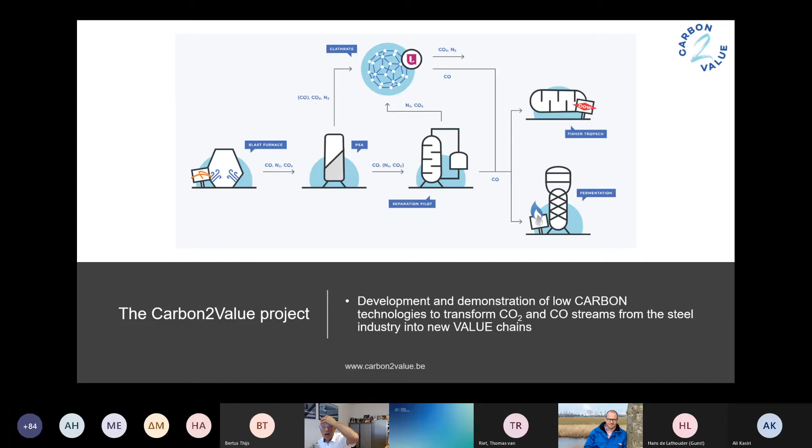What can you expect from today? We have 3 speakers from associated partners and consortium members. First, a state-of-the-art review by Jurjan Boon from TNO, followed by a presentation of the work done in Lille on developing clathrates for CO2 capture. We also asked ourselves how a process for CO2 capture with clathrates would look, where the challenges are, and what the potential costs would be. For that, we had a team from the University of Twente working on conceptual process design aspects of this technology. Hopefully by the end of this seminar, you'll have a clear view on what's possible with this option and whether it would be competitive to the state-of-the-art, and the more commercial applications we'll present on the 22nd of June.

With that, I think we should go back to Geoffrey, who will probably touch the poll again before we move into the technical content of today's webinar.

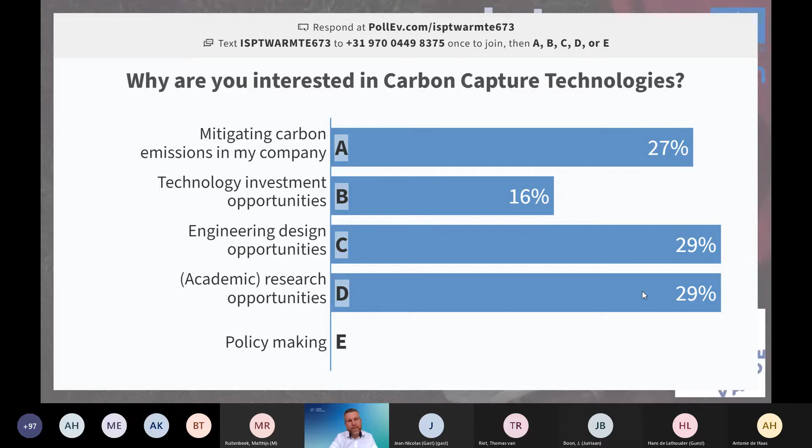Then I'd very much like to move to the content for which you came. I'd like to introduce Jurjan Boon, Senior Scientist Process Technology at the Dutch Research Institute TNO. He will provide us with context and tell us about the status and outlook of current CO2 capture technology. Jurjan, if you would be so kind. Thank you, Geoffrey. I hope you can all hear me right.

Then I will present. It's by no means meant as an exhaustive overview of everything that's going on, but I would like at least to leave you with a flavor of some of the things currently ongoing in Europe and throughout the world in terms of CO2 capture, and how the recent trend towards more efficient capture can really pave the way for the implementation of CCUS as an industrial technology.

Well, let's briefly recap why we're all doing this.

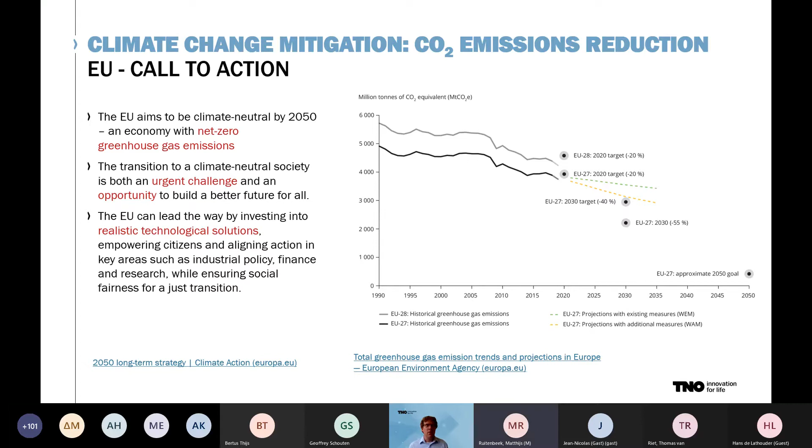And the EU is ready to lead by investing in what they call realistic technological solutions. So technology plays an important part in achieving these greenhouse gas emissions targets. If you look at the figure on the right, you can see that greenhouse emission intensity has gone down severely. At the same time, the targets for 2030 and even 2050 are still quite a long way off. So indeed, new technological solutions are called for.

Now, if we make a subdivision of industry in terms of different sectors, then it's clear that the iron and steel industry, as well as the cement industry, actually play an essential role in terms of CO2 emissions and CO2 emission reduction.

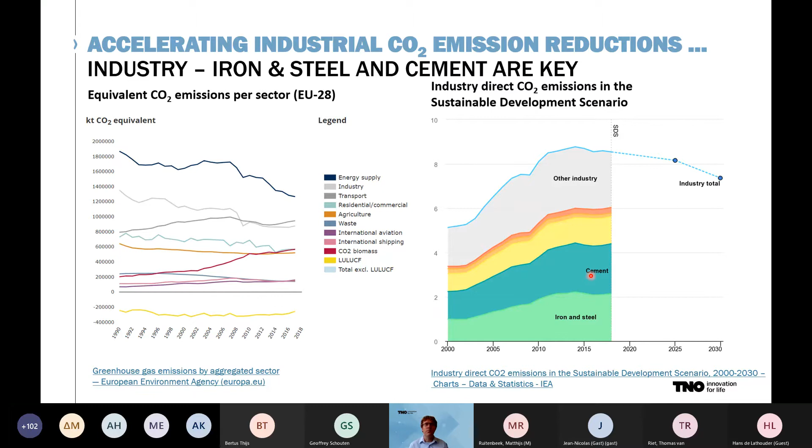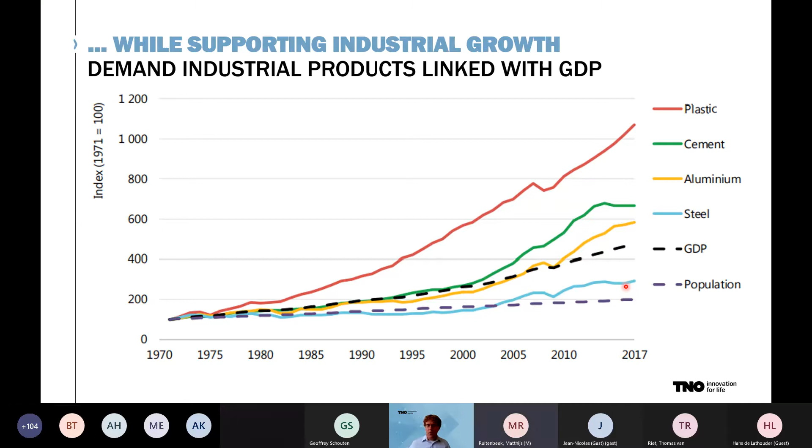Sorry, we've lost the slides. That's weird, let me see what I can do. Going to disconnect - yeah, same here, Jurjan. Maybe you can stop sharing and try again, because I hear you perfectly here. But okay, indeed we can hear you perfectly, it's just the slides have been lost. And now, it seems like, at least for me, the chat is not available. We are working to solve that issue. Oh, I see somebody else tried to share the screen - maybe that was the reason for it.

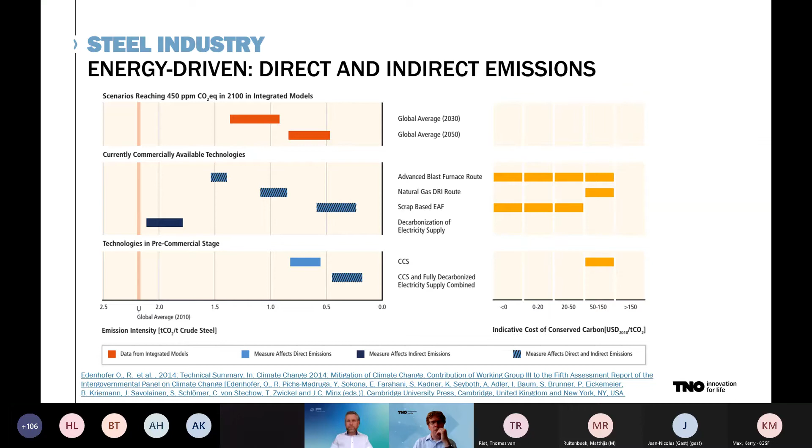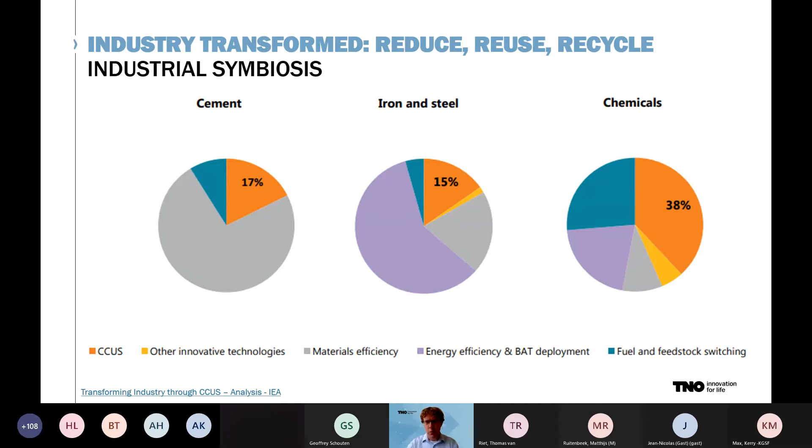There's also an opportunity for fuel and feedstock switching, which is actually the topic of the Carbon2Value project - to integrate the steel mill with the plastics industry, as Matthijs has explained in the beginning.

Well, some final remarks about CCUS.

CO2 capture is essential in the energy transition. It can be retrofitted to avoid significant amounts of CO2 from existing infrastructure. It can tackle emissions in difficult to decarbonize industries like cement, iron and steel, and chemicals. And it can also set up the infrastructure to move towards synthetic fuels and feedstock for long distance transport that are still required by 2050 and well beyond.

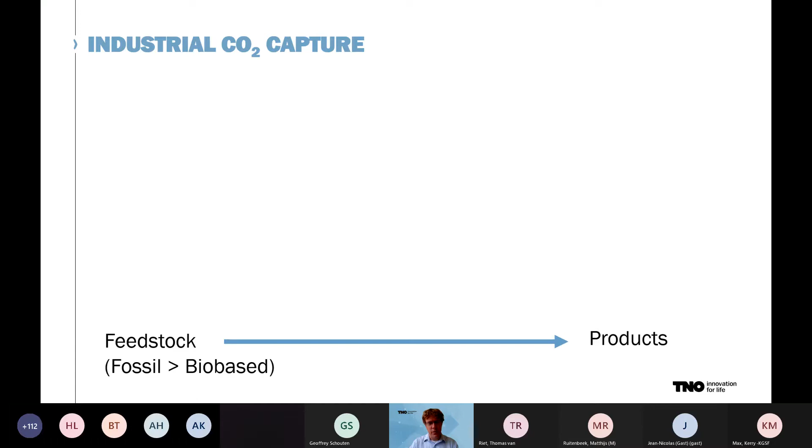But the carbon and hydrogen will still be the main constituents. We have an industry that creates these products from the feedstock. Of course, we have air to combust the feedstock and generate the heat often required to produce these products. That means out of the stack, we have a mixture of CO2, steam, and nitrogen coming out. This is a very rough simplification of the chemical industry. I'm a chemical engineer, so I'm very fond of simplifying things.

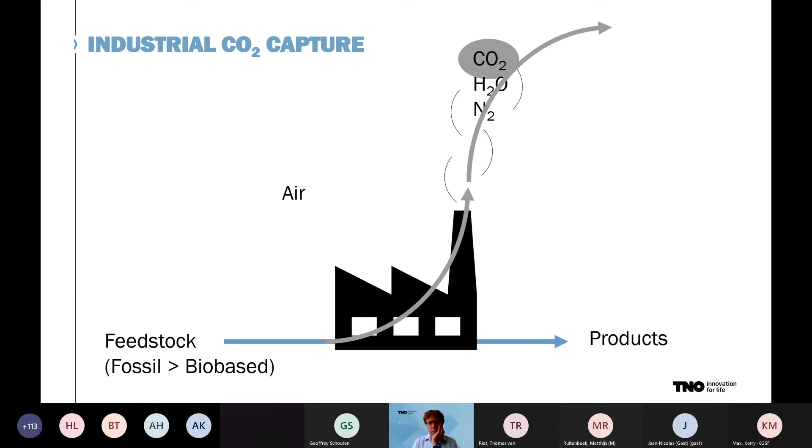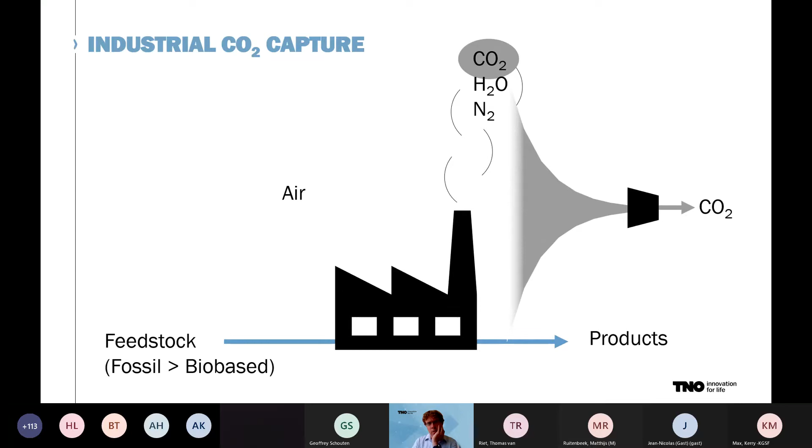If we follow the trajectory of the CO2, where it came from and where it ends up, we can draw along this line a figure of the concentration of CO2. Because from somewhere along this line, we need to capture the CO2. The reason I'm looking along this trajectory is because there's a big difference in the concentration of CO2, as I've tried to indicate here on the left. All the way at the end, when the CO2 is mixed in the air, we end up with about 400 ppm of CO2 at 1 bar. So that's a very low concentration of CO2, very dilute.

You could also think of end-of-pipe solutions in the tail gas of the process and capture the CO2 there. Then typically you are at 100 millibars of CO2. At the same time, it's also possible to capture the CO2 before, even in the process—what we call in-process CO2 capture. The figure on the left shows the importance of doing the CO2 capture as early as possible, because with the increase of the CO2 partial pressure, the ideal work required for the separation of CO2 is strongly decreased. So by moving earlier in the process, we significantly reduce the work required for CO2 separation.

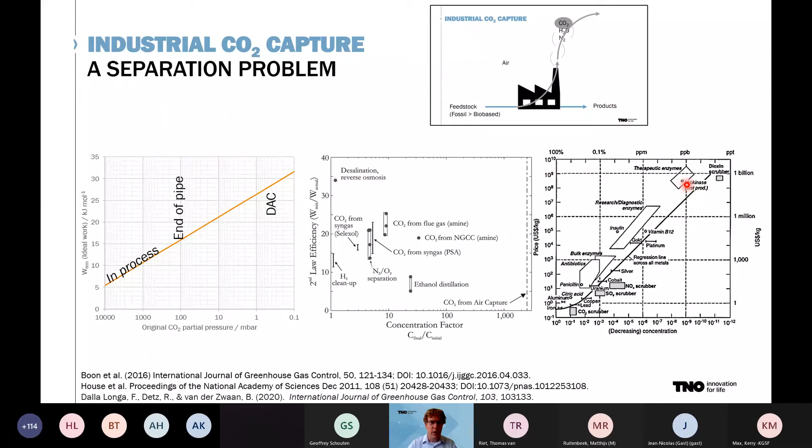Now, this is the ideal work, and the situation becomes even more severe if we also look at the efficiency of the process, because the efficiency tends to increase with a reduce in concentration factor, as shown in this graph. Finally, in terms of the economy of the process, again with decreasing concentration, we see the price of many separation processes follow this trajectory, where you have a significant increase in the price of a separation process the more dilute the species is you want to capture. So all of these three effects combined point quite strongly in the direction of what we call in-process CO2 capture.

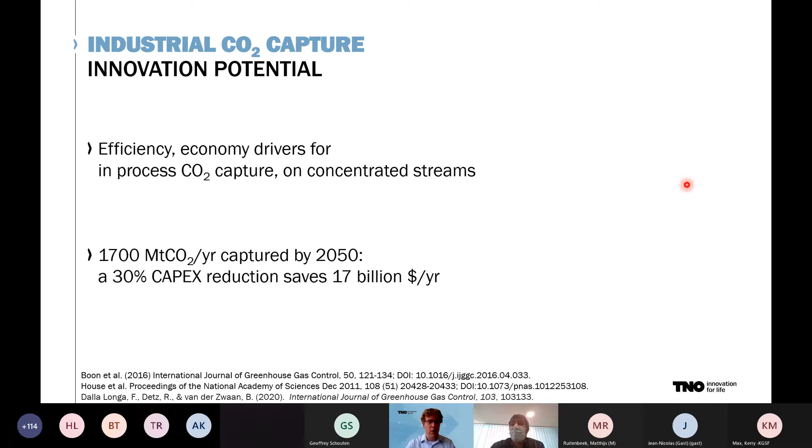So to summarize, that's also where the innovation potential is. The efficiency and economy are drivers for in-process CO2 capture on concentrated streams, and the market for CO2 capture is really significant. A recent publication from colleagues of mine at TNO in Amsterdam has shown that 30% capex reduction saves $17 billion per year by 2050. So there's really a strong driver for the improvement of the efficiency and capex of CO2 capture.

Now let's look at what can be done for steel gases. This is a simplified scheme of a steel production process, where we have coke production, a blast furnace to produce iron, and a basic oxygen furnace to finally produce steel. And there are three main sources of CO2 from these processes: the blast furnace gas, the basic oxygen furnace gas,

and the coke oven gas. Currently, the energy content of these streams is utilized internally for about 50%, which creates 50% of the CO2 emissions. But there's a lot of energy left, which is generally combusted in a power plant, which creates the other 50% of CO2 emissions, roughly.

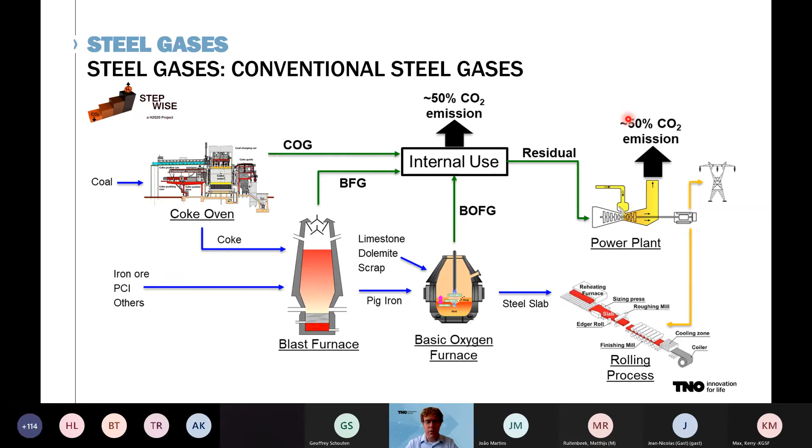Now, different ways to capture the CO2 from these gas streams are absorption, which is a gas liquid process. You contact the CO2 containing stream with a liquid that is able to absorb the CO2, which can then be released upon heating or depressurization.

Now, different technologies out there vary from chemical absorption to physical absorption, where a physical solvent typically produces a more linear graph of the absorption capacity versus partial pressure, which means that at the higher partial pressures, physical solvents are favored, whereas for CO2 capture from more dilute streams, lower partial pressures, chemical solvents are typically preferred.

And then there's Rectisol and Selexol, commercial processes available to capture CO2. The first one with chilled methanol, and the second one with DEPG.

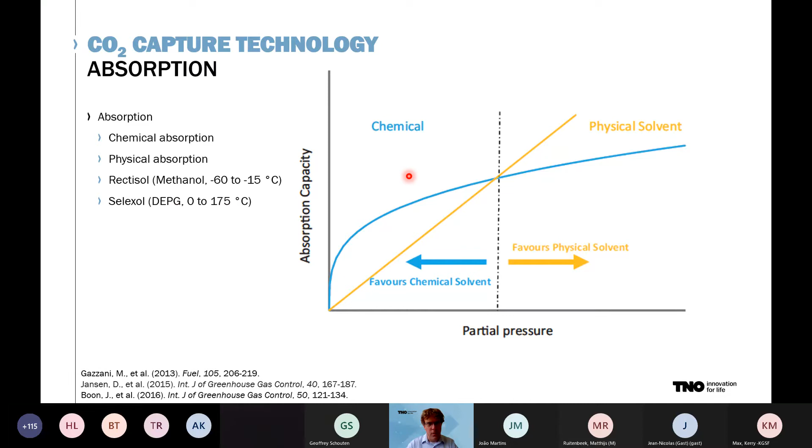Now, next to absorption, cryogenic separation is an option. This comes with a complexity that it cannot be used for too dilute streams. And well, too dilute is actually an understatement - you need typically above 90% CO2 in your gas stream to be able to use cryogenic separation efficiently. And then still, the energy penalty is an issue because of the refrigeration and steam removal that is required. Still, these systems are proposed for further purification of already concentrated CO2 streams to make them sequestration ready.

Then in terms of adsorption, actually the topic of today, different technologies have been proposed, ranging from pressure swing adsorption, vacuum swing adsorption, and temperature swing adsorption. And these systems have in common that they are multi-bed processes. So you have one or more beds that are adsorbing CO2, while other beds are being regenerated, so that the ensemble of the different beds creates a continuous cycle that recovers the CO2 from a stream.

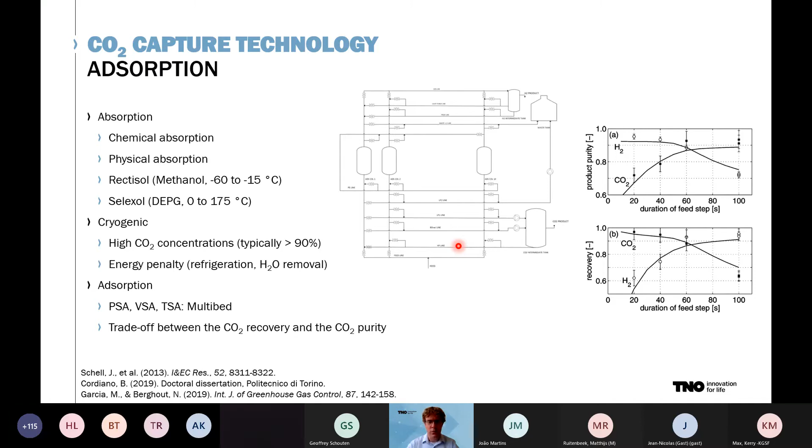And in the latter case, it's important to convert all your energy, so all the CO and hydrogen, into hydrogen, which can then be removed, which means that you separate actually the carbon from the energy content of your gas stream.

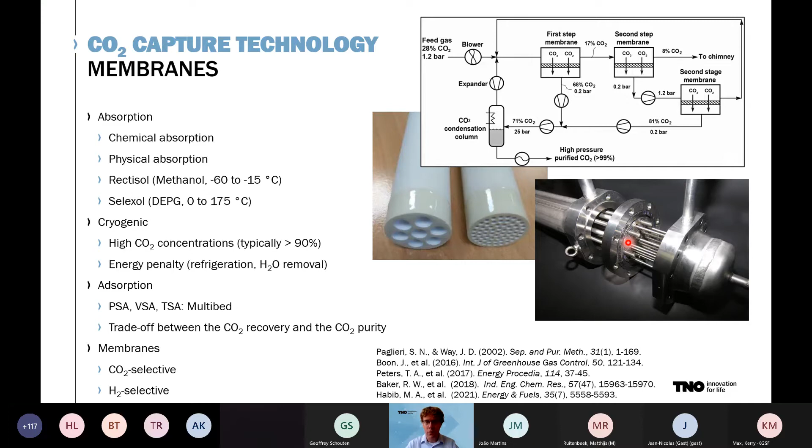Now, in looking again at the steel production case, clearly these three gas streams can be treated with the techniques I've just mentioned. I think it's important in this stage to also recall new developments in steelmaking, or in iron making, I should say, which is top gas recycling, which is basically an oxy-fuel technology. You remove the nitrogen from the air that's normally used in the blast furnace, which means that you end up with a concentrated stream of CO2.

Actually, you still need a CO2 separation unit, but the CO2 separation unit has to deal with a lot less nitrogen, so it's much easier to perform this separation. And at the same time, it allows you to recycle a concentrated carbon monoxide hydrogen stream into the blast furnace. Well, like I said, top gas recycling is a very big improvement in iron making being considered. At the same time, it still needs a CO2 separation unit. So all of the above is still valid, also in case of top gas recycling.

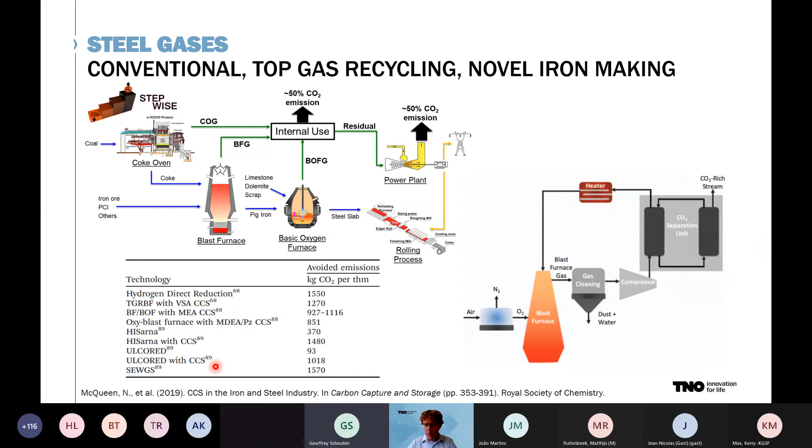Well, for your reference, if you're interested, have a look. This is also copied from the same reference, some recent initiatives.

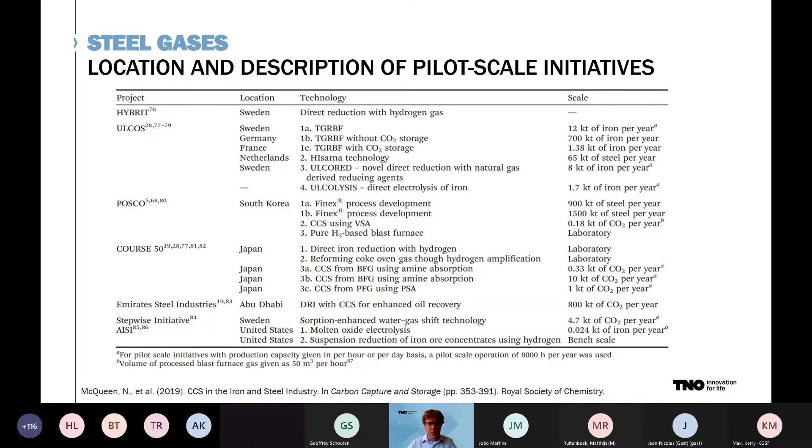As I've already said at the outset, it's impossible for me in 25 minutes to present a complete overview of everything that's being done in terms of CCS, even in the steel industry alone. So my proposal is to focus a bit on adsorption, which is really the topic of today.

Adsorption for CO2 separation is a technology that is not novel in itself. Commercially existing zeolites and active carbons are available to do pressure swing adsorption for CO2 removal. At the same time, these processes are really energy intensive and sometimes also capex intensive, so new developments are on the way to improve the efficiency of CO2 capture.

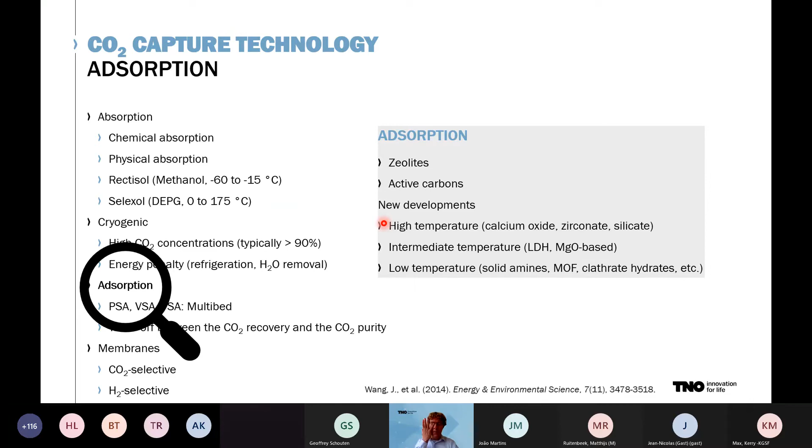Three important routes are good to mention: high temperature materials, calcium-based predominantly; intermediate temperature-based hydrotalcite; and low temperature adsorbents. To give you again a flavor of some of the developments.

For calcium, the Spanish Research Council, CSIC, is proposing what they call the CASOH process, where they do calcium looping. Calcium oxide is actually the species involved in binding with CO2 and then releasing it again upon regeneration, while working with a copper-based oxygen carrier in this process. As you can see here on the right, the different steps in steelmaking can be treated with different manifestations of the CASOH process.

And currently, the CASOH process prototype is being constructed at TRL7.

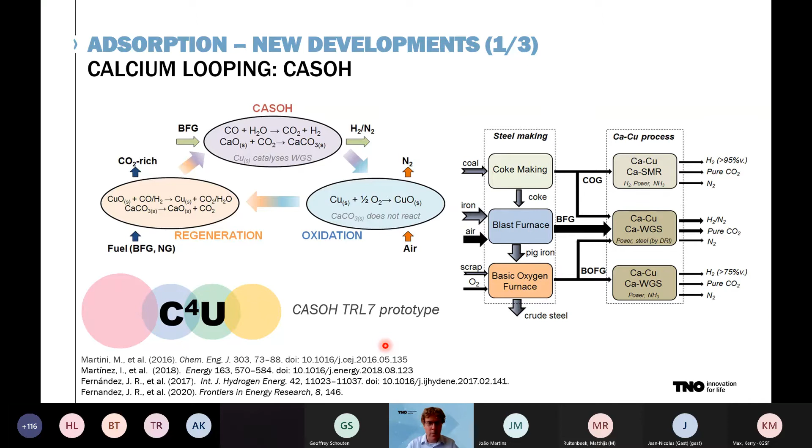The hydrotalcite-based route is also being developed at TRL7 currently in the Initiate project, where already in a predecessor, the Stepwise project, it was shown that the different streams of the steel gas can be treated separately or together, which then in the end leaves the highest CO2 reduction potential. It can go down to 0.6 tons of CO2 per ton of steel at a CO2 avoidance cost of 33 euros per ton. With the current ETS price of 53 euros per ton, that's not bad at all.

So, promising development. And then, Geoffrey, I'm glad I can end my presentation here, because I think another important topic of today is the clathrate hydrate, a new development in low temperature adsorption process. But I'm definitely not the best placed to tell you anything about that, so I will leave that to the other presenters. Thank you for your attention.

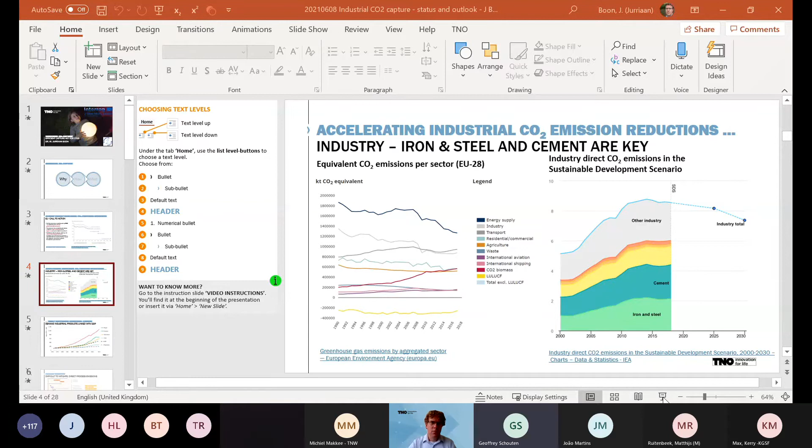Jurriaan, I think people are either shy or your presentation was very clear. Wow.

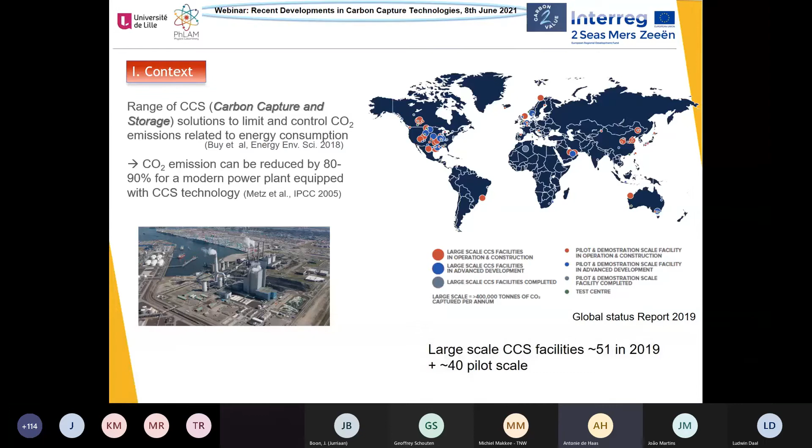On this world map, we can see the growing presence of CCS around the world. In 2019, the number of large-scale CCS facilities increased to 51, while there are about 40 pilot and demonstration scale CCS facilities operating or about to be commissioned. All these constructions have the capacity to capture and permanently store around 40 million tons of CO2 every year, and this number is expected to increase by about 1 million in the next 18 months.

So we can see here the current CCS methods under investigation. I will not enter into the details of all these techniques, but we can see that they all show advantages and also drawbacks. The most commercially mature are both chemical absorption and physical absorption techniques, but they still present some inconveniences.

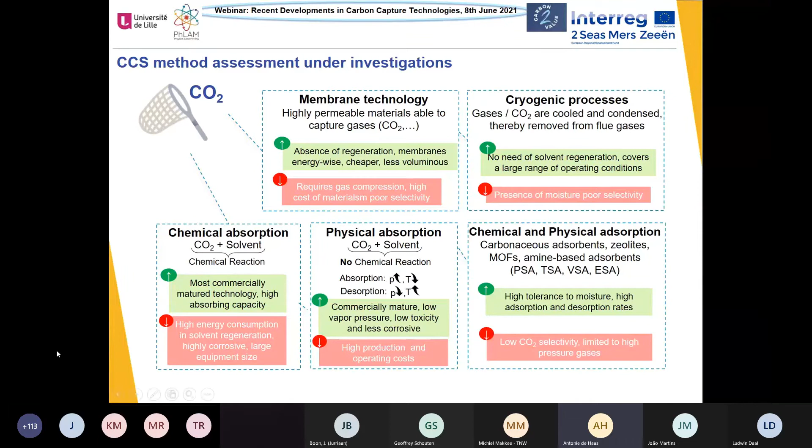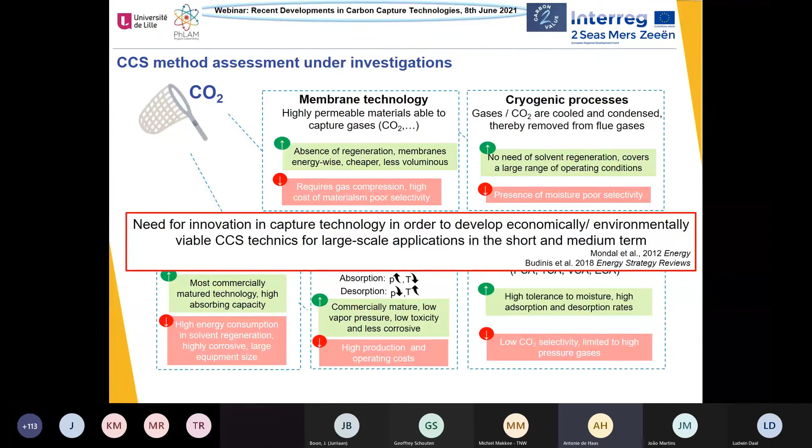With this consideration, it appears there is a need to develop innovative CCS techniques that are economically and environmentally viable for large-scale application in the short to medium term. Next generation technologies need to be developed to drive down CCS development cost and shorten deployment timelines. The next generation capture technology will have innovative materials, processes, or equipment which will reduce capital and operating costs, but also improve capture performance. In this context, one of the alternatives is the Hydrate-Based Separation Process, which can be applied to different CCS technologies.

Generally, the other components are nitrogen or carbon monoxide. The CO2 hydrates which have been produced can further be transported for long-term storage. This HBSP process can also be applied to industrial or pre-combustion CCS technology, where the gas to be treated varies significantly. In pre-combustion, for example, the CO2 needs to be separated from hydrogen.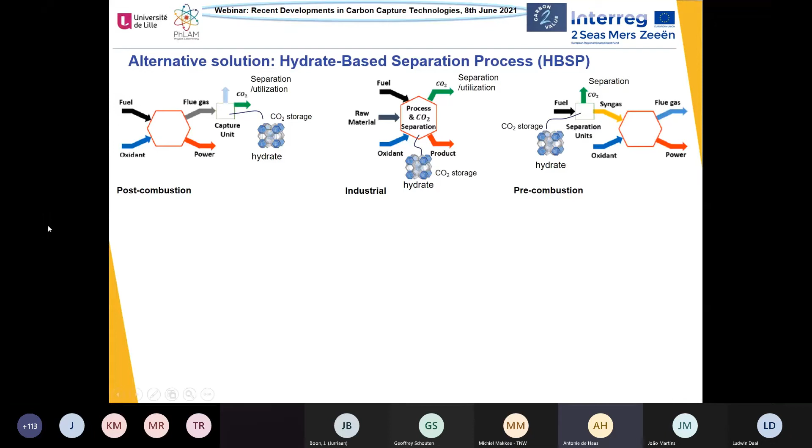So what and why use this hydrate process? What are hydrates or gas hydrates? Gas hydrates are crystalline inclusion compounds that encapsulate gas molecules. They occur naturally on Earth and represent a huge natural gas energy reserve, higher than oil and coal, containing hydrocarbon gases like methane or ethane. We can see here a natural occurrence of gas hydrates. They generally form along the continental margin or also in the permafrost region.

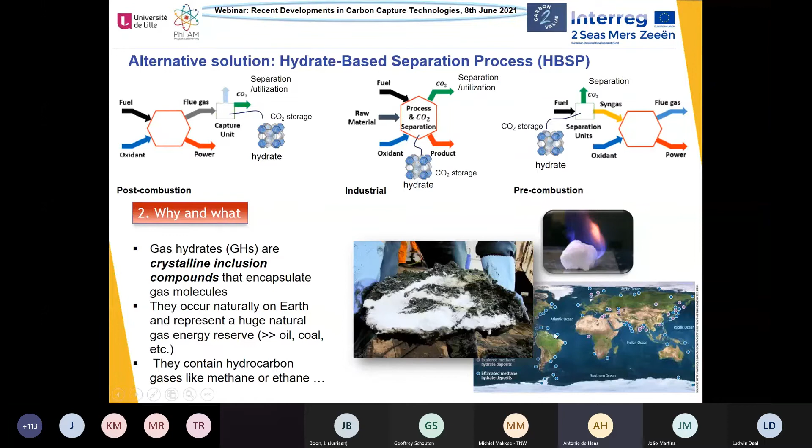So how do these clathrate hydrates form? They form different structures, as we can see here: structure 1, structure 2, and structure H. These structures are composed of water cavities. Let's begin with molecules, for example, CO2. When CO2 enters in contact with water molecules under certain conditions, they form cages. These water molecules form cages, and the gas molecule, the CO2 here, is captured inside the cavity. The cavities are arranged periodically and form a periodic network of a crystal that forms these kinds of structures.

Not only CO2 can be captured inside these cavities, but also different molecules like nitrogen, carbon monoxide, methane, ethane, propane, and so on. So in this sense, these clathrates are crystalline compounds.

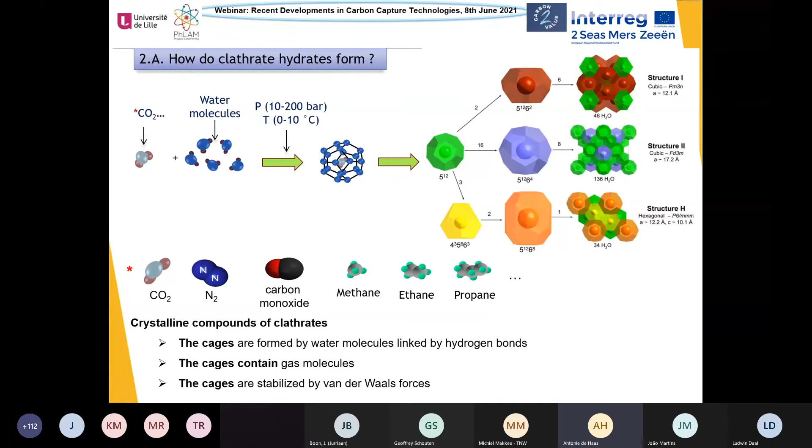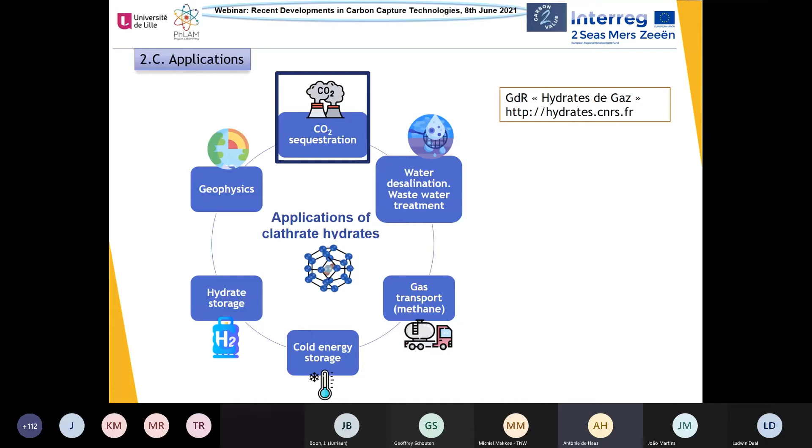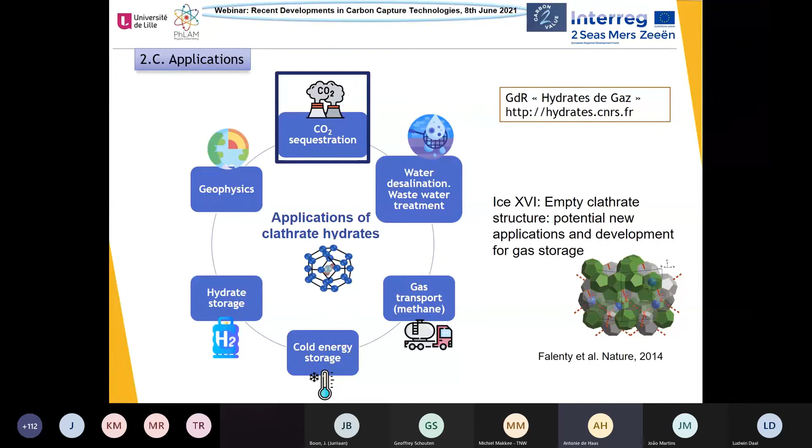If you want to know more about this application, you can have a look at the website of GDR, Groupement de Recherche Hydrates de Gaz, where all these applications are currently being investigated by the French community working on hydrates. A word also about a laboratory curiosity: this concerns the empty clathrate structure, which has been recently discovered, and this may open the way to new applications and the development of new gas storage efficiency in this structure.

So how does the hydrate-based separation process work? This is the principle. We have industrial typical flue gas mixtures containing CO2 and nitrogen. The composition is about 3 to 35 percent CO2 in post-combustion.

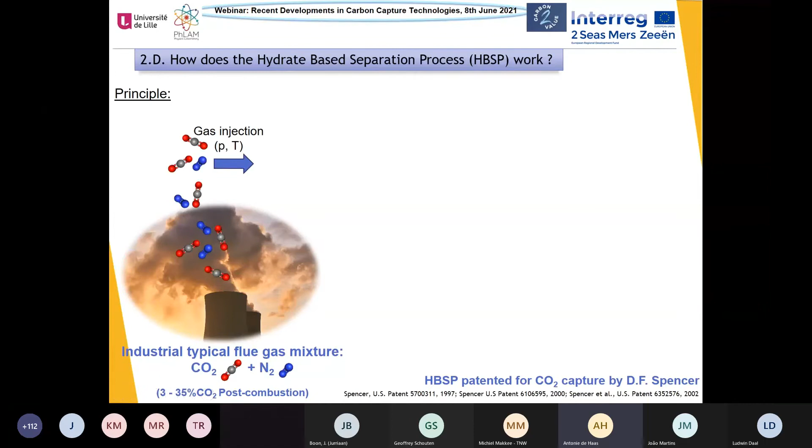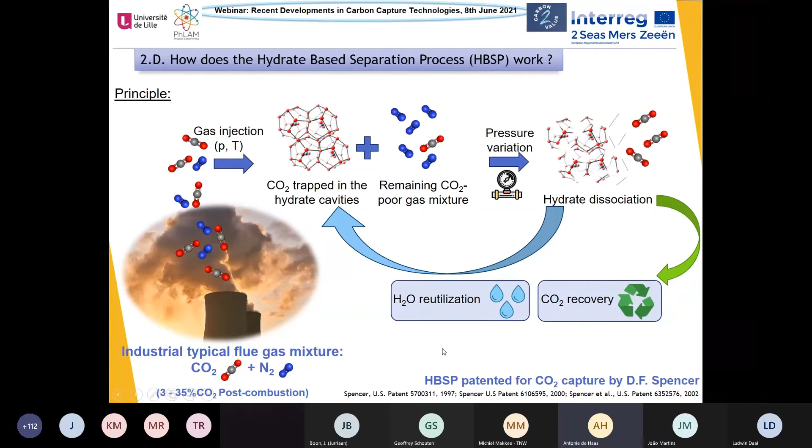These molecules are emitted and sent to the capture unit, where the CO2 is then trapped in the hydrate cavities selectively, and only nitrogen, or almost pure nitrogen gas, is emitted into the atmosphere. By using pressure variation in the capture unit, the hydrate can be dissociated, and the CO2 can be further reused for applications or stored for long-term storage. The water can be utilized again for another cycle. This hydrate-based separation process was patented for CO2 capture by D.F. Spencer more than 20 years ago.

So we can see here a typical conceptual design of a process. This is, for example, in post-combustion. The flue gas is firstly pressurized using this gas compressor and cooled to the environmental temperature.

And this high pressure gas is sent to the hydrate reactor, where it is cooled down to the hydrate formation conditions. When the vapor-liquid-hydrate equilibrium is reached, the main composition of the vapor phase is only the remaining gas—it can be nitrogen or hydrogen—which are directly released into the atmosphere.

So the hydrate, which is CO2 rich, is then pumped. This is a hydrate slurry, pumped to a slurry heater and sent to the separator for decomposition, either by heating or by applying a lower pressure to obtain gaseous CO2 and liquid water. The gaseous CO2 is generally at high pressure, and the liquid water is sent back to the hydrate reactor and cooled down for use in a new cycle.

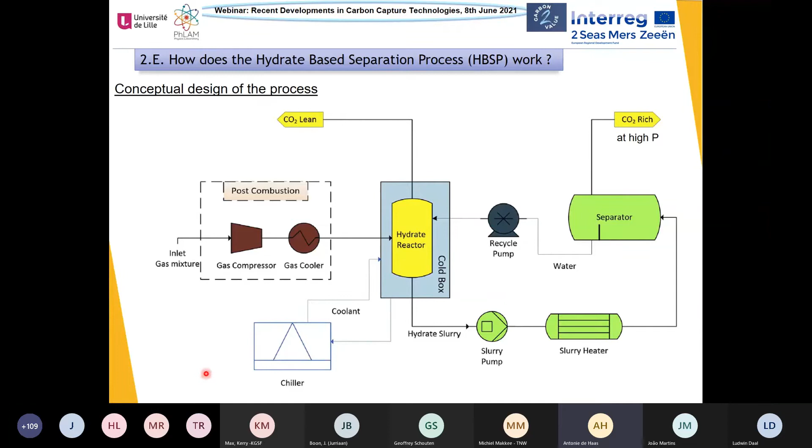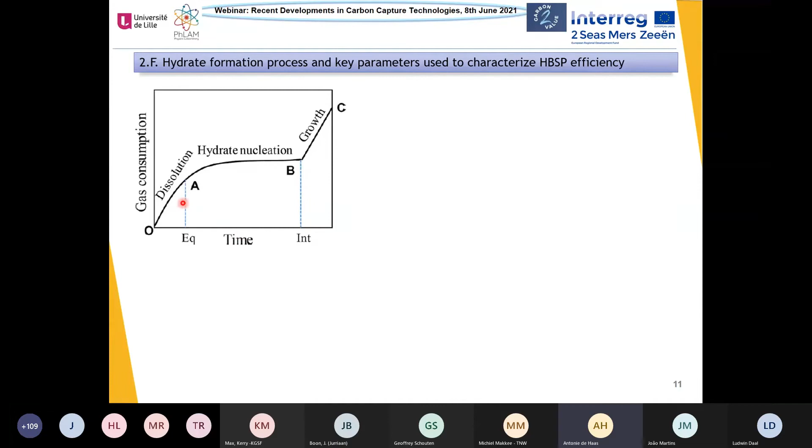So the formation conditions of the hydrate are divided into 3 steps, as we can see on this plot represented as a function of time. Step O to A is the dissolution of the hydrate-forming gas in the liquid, and step A to B corresponds to the nucleation step, where small crystals are forming in the liquid.

And finally, from B to C, this is the growth step, where there is a linear increase of gas consumption during this last event. So the hydrate-based separation process is quantified by performance parameters.

And this depends on the induction time, on the gas consumption, and also on the recovery and separation factor. The recovery fraction and separation factor are two important parameters. They represent the quantity that the hydrate can capture, and the selectivity or separation factor represents how well you can separate CO2 from the other gases.

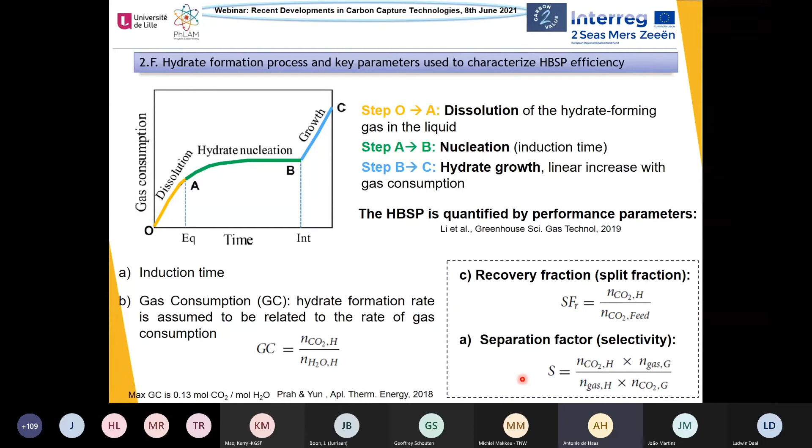So the development of promoters is important to reduce the conditions of formation of the hydrate. This has been done by adding tetrabutyl ammonium bromide to the system. We can see the effect—this is a thermodynamic effect.

This is the equilibrium line of CO2 and water, and this is the stability space where the hydrate can be stable. When you add this molecule in the liquid system to form the hydrate, you can see that this line is shifted to the right, and like this, the formation conditions are reduced. You can form hydrate at already 10 bar and about 9 degrees C.

So this is how the structure of a new hydrate looks like. This is called a semi-clathrate, and this is where the gas molecule, the CO2, can be captured and separated from the other molecules.

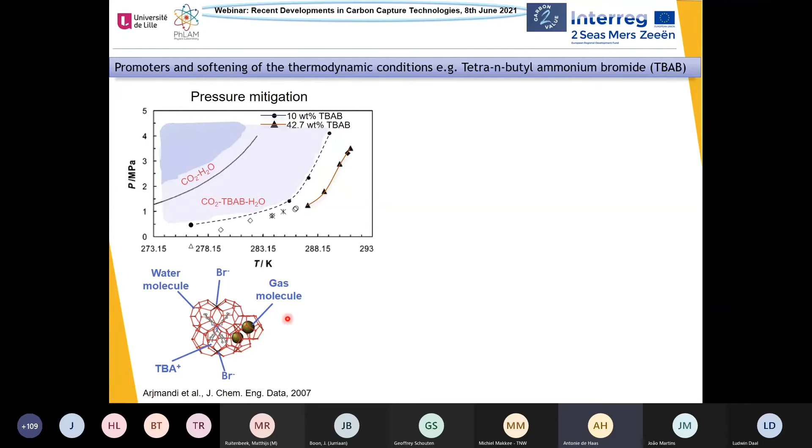So the selectivity is also important to be evaluated with this new system. But already 20 years ago, Kang and Seo evaluated the selectivity in the water and CO2-nitrogen system, and they showed that they can reach about 95% already by a two-stage separation process, with the maximum CO2 to be captured being 8,000 tons per day.

And a more recent evaluation using promoters like TBAB has shown that a two-stage process is possible, with a recovery of 90% of CO2. Like this, the energy consumption compares favorably in the hydrate-based separation process versus the amine-based process, from 1.12 to 2.4 kilowatt hours per kilogram of CO2, compared to 2 to 2.8 kilowatt hours per kilogram of CO2 for the amine-based process.

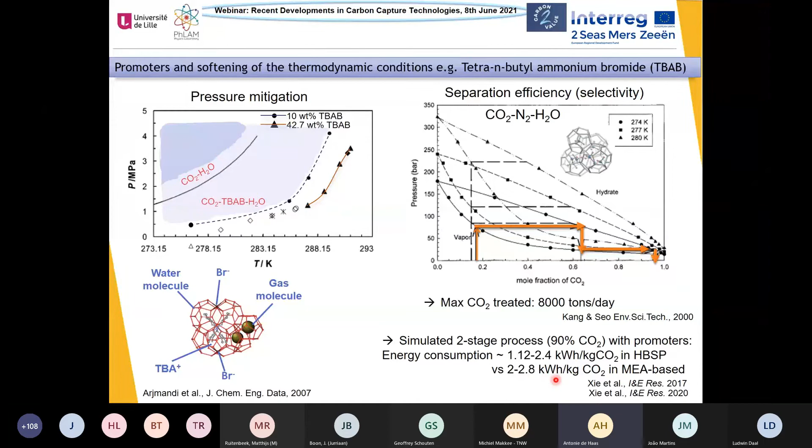So next we summarize here 10 years of experimental data and experimental efforts to better assess the CO2 capture efficiency in hydrate-based separation process. We do cross-laboratory and cross-batch measurement comparisons of literature data, shown here in black, and our data, shown here in red, obtained using our newly developed laser technique.

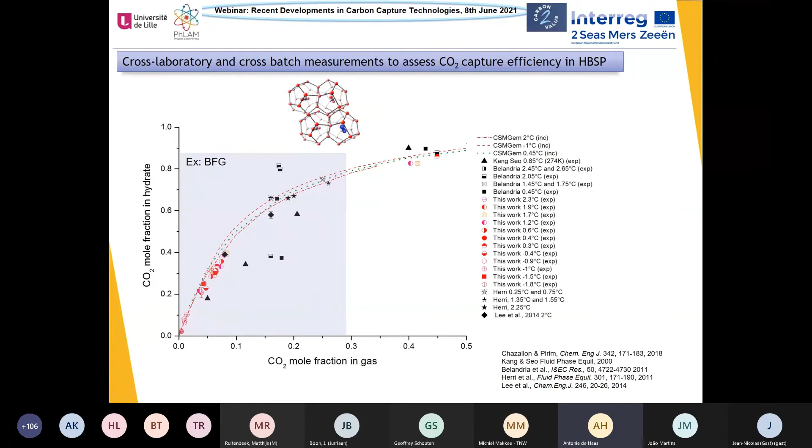We can see here the performance parameter: this is the selectivity as a function of different parameters, the concentration of CO2. We were able to show that the selectivity of structure 1 hydrate is better than that of structure 2, and also that there is a maximum at 20% CO2, which is rather interesting because it corresponds to a typical flue gas treatment composition. There is also some slight but significant influence of pressure and temperature on the selectivity of the hydrate formation conditions.

So we have summarized here the meaning of all these measurements. If you have a flue gas inlet composition of 10%, then the selectivity we obtain of 7-8 means that the composition of CO2 in the hydrate can be 5 times more important than in the gas phase. We also derive the recovery: it means that we can capture about 55% of the CO2 in one stage of hydrate formation.

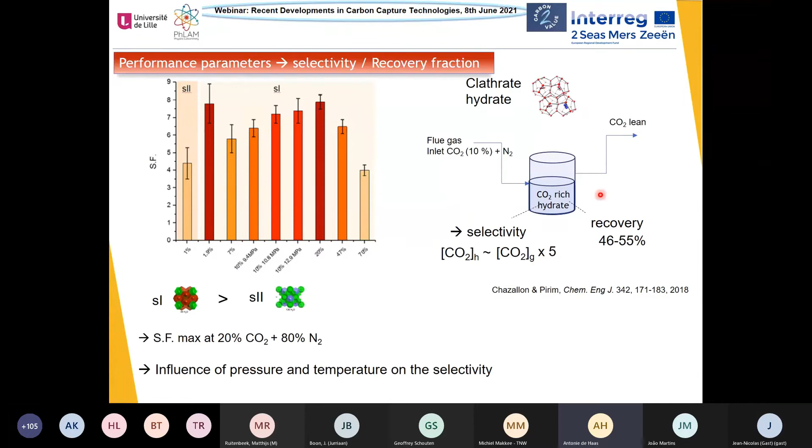We investigated also the selectivity in semi-clathrate hydrates, which means adding a promoter to reduce the formation conditions. We see here, summarized, that for the same inlet composition we obtain a better selectivity: the CO2 hydrate compositions can be 8 to 13 times better than in the gas phase. However, the recovery fraction, the capture quantity of CO2, reaches 35% in one stage. These results have been compared to other groups, who, depending on the protocol they used, obtained an even higher selectivity in their semi-clathrate samples.

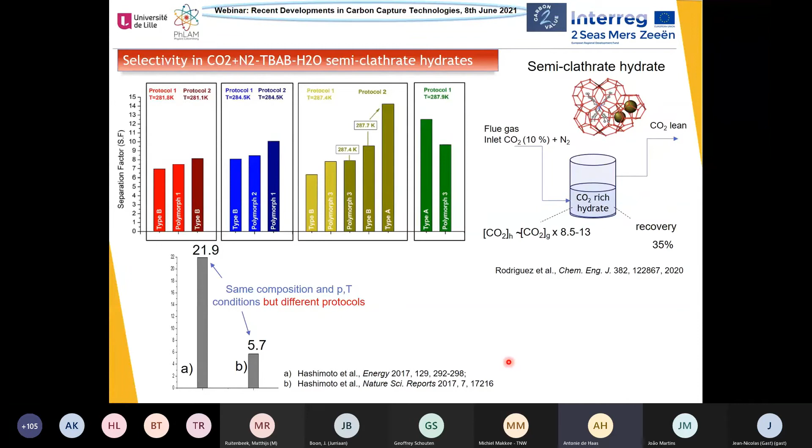So I want to highlight now some new directions and achievements since 2014. It should first be noted that most of the reported data on the HBSP process were obtained in batch mode or semi-batch mode, meaning they were obtained using a closed reactor in laboratory, or gas flowing through water in a reactor. However, to get closer to practical considerations in industrial applications, it is important to develop an experimental proof of the concept I showed you a few slides before.

This is what has been done by Sun and co-workers. This is the diagram: they developed a new apparatus that allows continuous formation in this reactor and dissociation in a second reactor of the hydrate for separation of gases. They showed in several experiments that it is possible to recover up to 65% of CO2 in the hydrate phase, using a promoter and working at atmospheric pressure. This first preliminary study laid the foundation for potential industrial applications of hydrate separation methods.

I would also like to mention that new chemical promoters and materials, or hybrid systems with amines and hydrates, are continuously being investigated to improve the efficiency of the HBSP process.

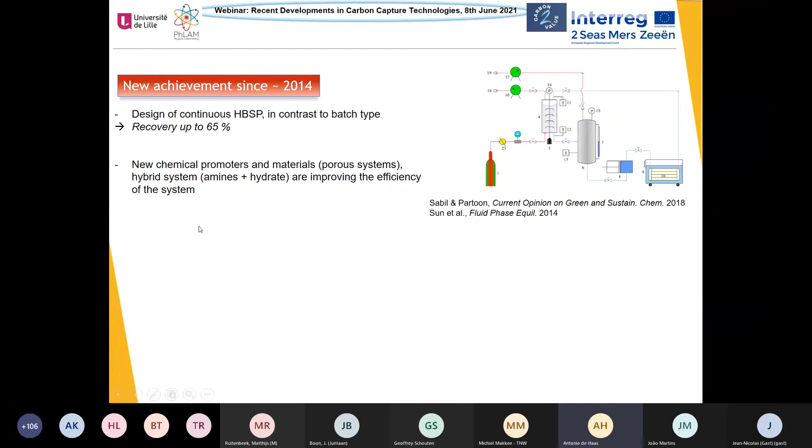So you obtain pure CO2 and water hydrates that can then be separated and washed, and after dissociating, CO2 is then separated for storage and capture. The water from the dissociated hydrates is pure water and can be used as potable water. The remaining salty solution can be separated from the seawater as brine.

So this concept of CO2 capture by hydrate-based process and simultaneous seawater desalination is being intensively investigated at present time in the hydrate community, for its potential application in an industrial concept.

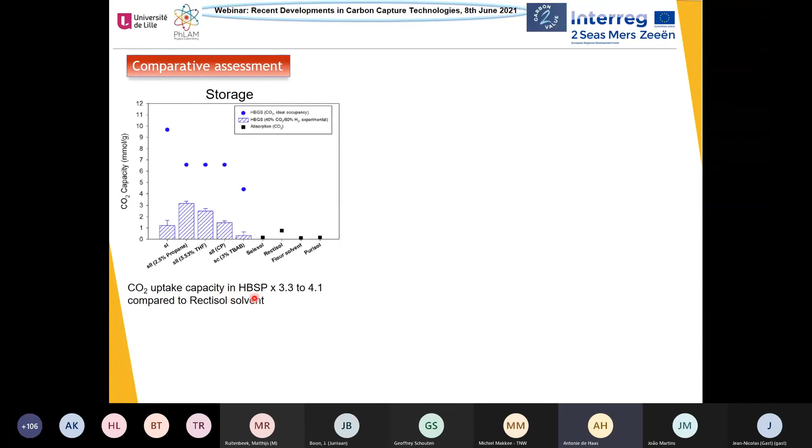For the upscaling of the hydrate-based separation process, it is necessary to do a comparative assessment of the efficiency of the process. First, this can be done by considering the CO2 capacity and storage capacity of CO2 in different processes. We can see that the CO2 capacity for structure 1 or even structure 2 is higher than the maximum capacities achievable for conventional solvents like Selexol, Rectisol, Fluor solvent or Purisol. These solvents are used for physical absorption in industry for CO2 separation, but they generally require low temperatures in the range of 200K to work, and so they have a negative impact on the economic evaluation. The CO2 uptake capacity in hydrate-based separation can be 3.3 to 4.1 times higher.

So now to summarize and give future directions: lab scale experimentation showed that the hydrate-based separation process is a novel technology with high potential for CO2 capture. Both chemical approaches, meaning promoters and porous materials, and mechanical design of reactors need to be combined to achieve the ultimate performance of this technology. More economic and energetic evaluation can lead to a comprehensive comparison of the hydrate-based process with other existing CO2 capture technologies, and this will be presented in the next presentation. Scaling up the process will help achieve such assessment, and it is necessary to develop continuous and semi-continuous setups with proper reactor type and design.

So I thank you for your attention, and I wait for your questions. Thank you.

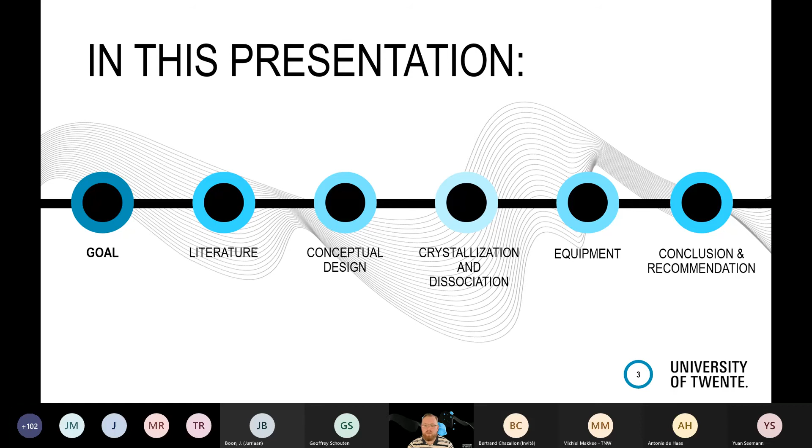So what can be expected in this presentation? First, we will discuss the goal of the project, followed by a selection of literature that we use to form a conceptual design. In the conceptual design, we will dive a bit deeper into the crystallization and dissociation units, together with the equipment needed for that, and a conclusion and recommendation on how to proceed further.

So the goal is to evaluate if clathrates can be used as an alternative to, for example, the energy-intensive amine process, and the plant design will follow the next principles. We have the blast furnace gas, and we use clathrates to capture the CO2, which we then should process to be able to store it, and the CO is then processed.

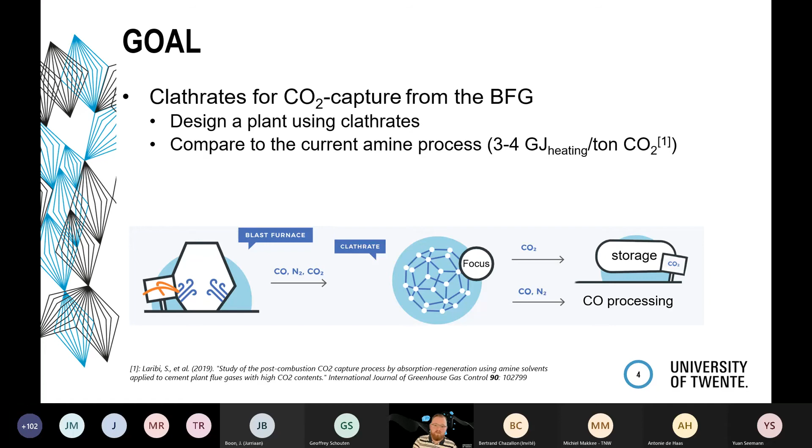The design basis that we considered: the feed is of course blast furnace gas of 350,000 cubic meters per hour at a pressure of 1.3 bars and a temperature of 35 degrees, and it contains roughly 25 volume% of CO2.

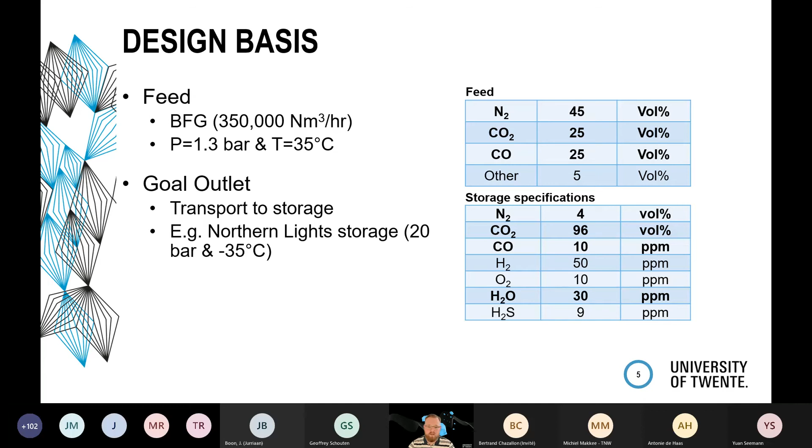The goal is to have an outlet, for example, for storage. An example project that stores CO2 is the Northern Lights storage, and for this we have to bring it up to spec, at 20 bars and minus 35 degrees, and we should have at least 96 volume% of CO2 in there for this specific project, and other projects are similar to this.

So what was our plan of action to explore this technique? First, we did a literature study and considered three clathrate families: the clathrate hydrates, the semi-clathrates, and the hydroquinone-based clathrates. Since most literature was available for the clathrate hydrates, we used this to develop a workflow and a crystallizer model. From this, we got insights on the crystallizer unit itself, and were able to do some calculations on pumps and compressors, and also the release vessel.

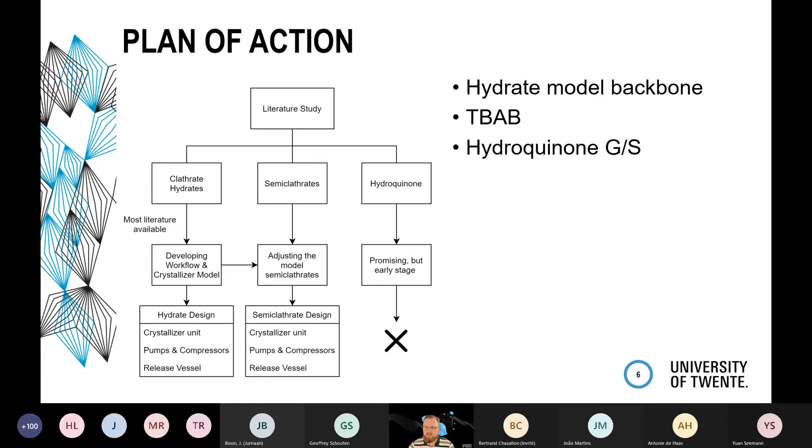Thereafter, we used the hydrate model as the backbone to make a model for the semi-clathrates, more specifically for tetrabutyl ammonium bromide, TBAB, that Bertrand also showed, which again resulted in quite some interesting insights. Then there is the hydroquinone family, which seemed very interesting to us, but we found out that it was too early to explore this type of clathrate, mostly due to lack of data and the fact that it's a gas-solid system. You have solid particles which are impregnated with the hydroquinone, instead of the gas-liquid-solid system like the other two, therefore requiring a completely new model to be developed.

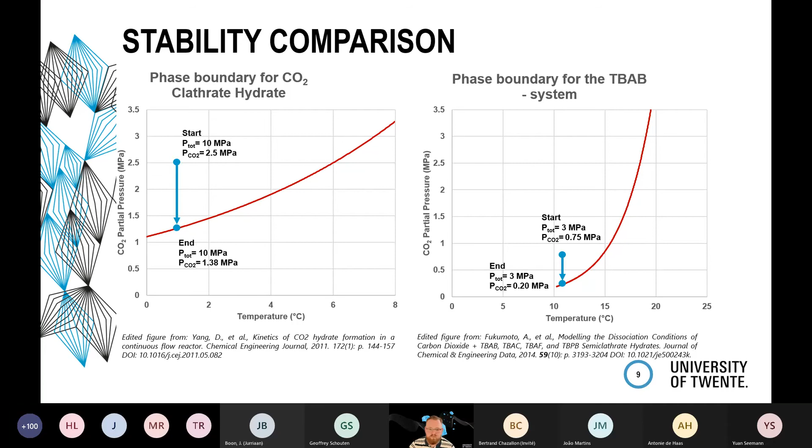Then the challenges: most literature is still on lab scale and considers mostly binary and sometimes tertiary mixtures. There are no real comparable processes for the crystallizer, since for optimal usage we need a gas liquid solid system, and conventional crystallizers have a supersaturated liquid which crystallizes, so you get a solid. It is key for this process to be in contact with the gas at all times.

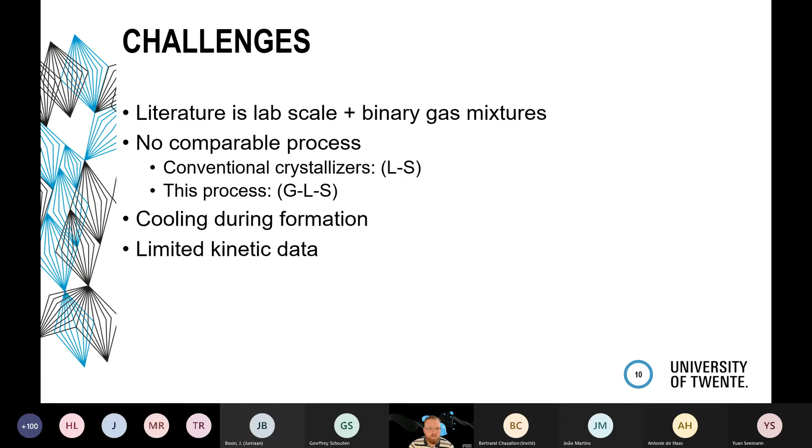Like we saw in the previous slides, we have quite a high exothermic reaction during this formation. So it is very important to extract that heat, because otherwise we might get a temperature increase and then the conditions are not the same anymore. We have limited kinetic data, so we had to make some assumptions, like I explained before, for mostly the semi-clathrates.

Now I will explain the conceptual design. Basically, we have to pre-treat the blast furnace gas to get a lot of impurities out, pressurize it, then feed it into the crystallizer, where it then captures the CO2. The hydrates or clathrates are then moved to the CO2 release vessel, where the clathrates are dissociated and the CO2-rich gas is then released. This needs some after treatment and probably repressurization to be able to store it. The CO2-lean gas stream that comes from the crystallizer can then be used for CO processing.

In the next slides, we will dive a bit deeper into the crystallizer and explain how we modeled it, and this resulted in some equipment ideas. We will do the same for the CO2 release vessel, where the clathrates dissociate, and we will explain something about the dissociation pressures needed for that, and also some ideas on equipment.

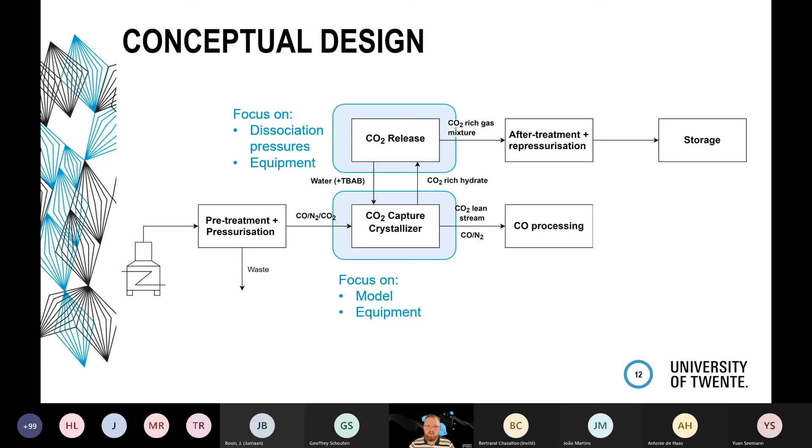Yes, thank you, Mike. So I will continue with a deeper dive into the crystallization and the dissociation for this process.

So first of all, the crystallizer model. To try and quantify what goes on inside the CO2 capture crystallizer, we created a model. The goal for this model for us was to be able to determine a few things: first of all, the degree of clathrate formation, the degree of CO2 removal from the blast furnace gas. Also determine the composition of the gas that is captured by the clathrates, and give insights into the liquid to gas ratios and the dimensions of the column.

Now, to create this crystallizer model, we had to make quite a few assumptions, and here some of the key assumptions are listed. First of all, we assumed constant temperature within the crystallizer. Instead of using fugacity to describe the system, we used pressure, therefore giving us a driving force of the difference between the partial pressure of CO2 and the partial pressure of CO2 at equilibrium. And for the dissolution of the gas into the liquid, we only considered the liquid side mass transfer resistance.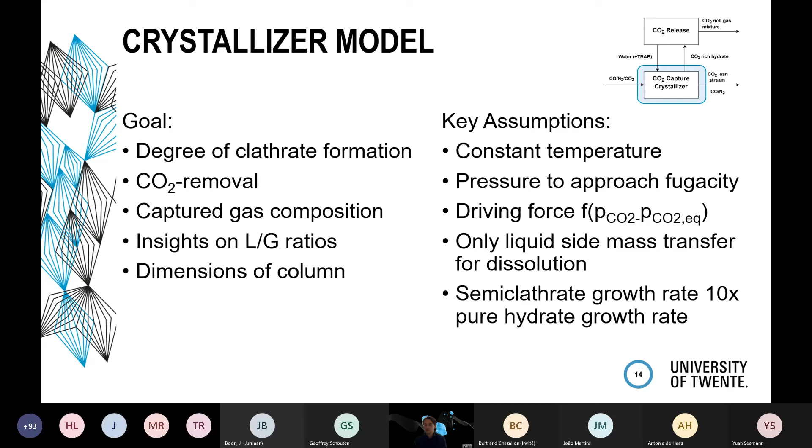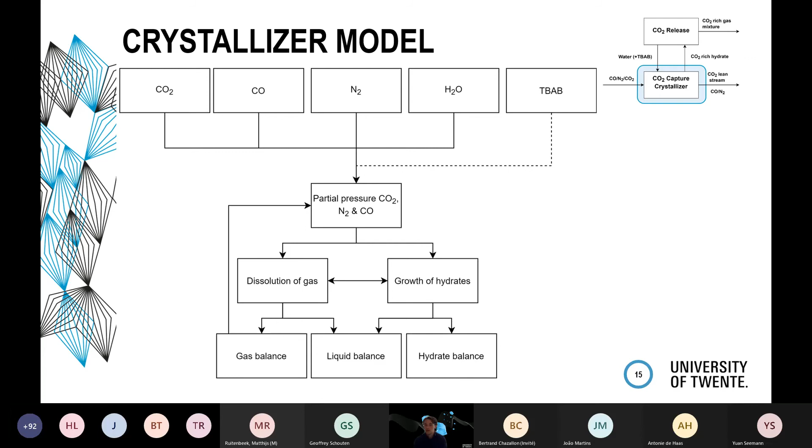Here is a block scheme showing a simplified version of how the model works. At the top are all the components we consider. In the gas phase, we get a certain partial pressure of the gases, and this partial pressure determines the rate of dissolution of the gas and the growth of the hydrates. The growth of the hydrates determines the liquid balance and the hydrate balance, and the dissolution of gas determines the liquid balance and the gas balance. This gas balance will then determine again the partial pressures of the gases, and that will be one iteration.

So what are the main results from this model? First, we looked at what would happen at equilibrium. We used a very long reactor, and to compare them more effectively, we used for both the pure hydrate and the semi-clathrate the same dissociation pressure in the release vessel and the same extent of crystallization, so 50 weight% crystals in the liquid slurry.

The main results show that for semi-clathrates we can produce a lower CO2 content in the CO2 lean stream, and also a higher CO2 purity in the CO2 rich stream. Looking at the kinetics, the gas residence time is considerably lower for the semi-clathrates, resulting in smaller equipment. However, the drawback of the semi-clathrates is that due to a lower capacity, seen in the mass percentage CO2 in hydrate, we also need a much higher liquid to gas ratio, meaning a lot more liquid needs to be handled.

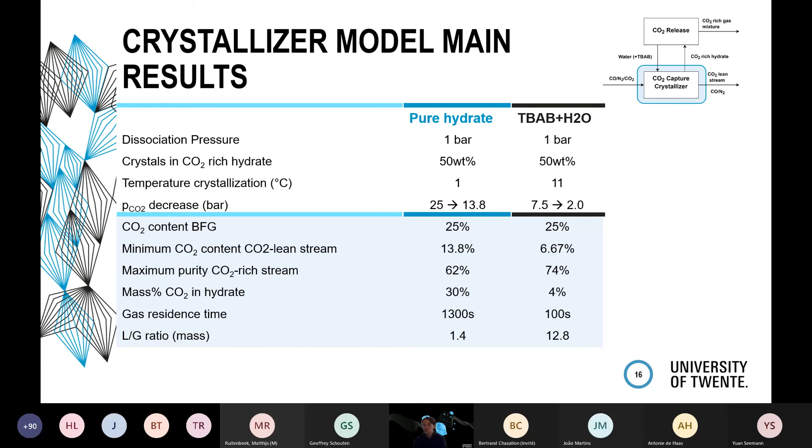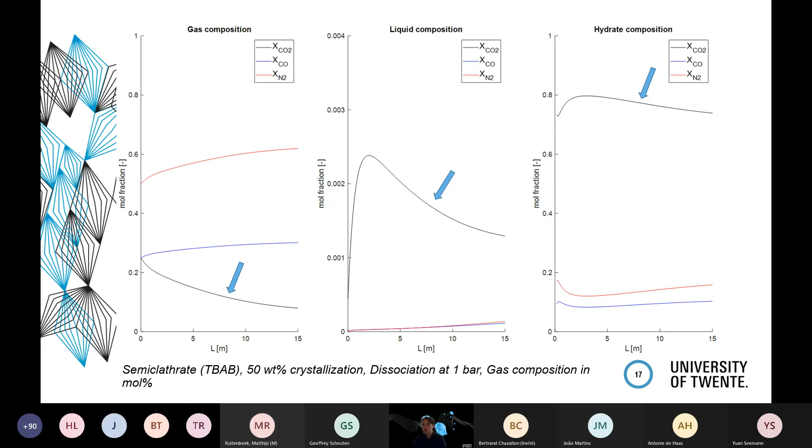Here are the three different balances for the gas, the liquid, and the hydrate for this model, and on the y-axis we see the mole fraction of the gases. First, in the gas phase we see clearly that over the length of the reactor, the CO2 content goes down. In the liquid phase, initially a lot of CO2 dissolves, and then slowly as the partial pressure decreases, this will also decrease. In the hydrate, we see a CO2 rich composition.

Another important part of this is the release of CO2 from the hydrates, and especially the influence of the pressure at which we release the gas on the composition of the gas we get. At lower pressures, the composition of CO2 is higher. As the pressure increases in the release vessel, much more CO2 is dissolved back into the liquid, because it's much more soluble than the other gases, so the composition decreases. At a certain release pressure, you will even get that all the CO2 can be stored inside the liquid, because we assume that in this case the liquid will probably be saturated after release.

We also looked at this for the different types of clathrates. For the pure hydrate at 15% crystallization, there is still quite a large pressure range at which we can effectively release the CO2, because there is a low liquid content. On the other hand, for the semi-clathrates, because there is a much larger liquid content, only at very low pressures is it viable to release this CO2, because otherwise very quickly there is no CO2 left in the gas that is released.

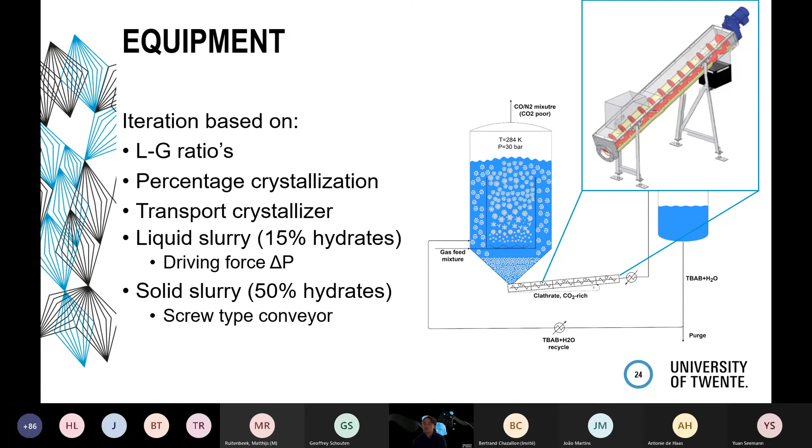So then the conclusion and recommendation. First, I will quickly summarize the different processes and compare the two clathrate cases to the amine process, the MEA process.

For both clathrate processes, the cooling with refrigerant is significant since we're below 20 degrees C. The good thing is that for the dissociation, we can use rest heat coming from the plant, or the cooling for the compressors.

We see that the TBAB process requires a very large recycle of solution, which consists of roughly 30% TBAB and the rest water. We operate at high pressures for both the hydrate process and the TBAB process. However, using the semi-clathrates, the TBAB process, we can reduce it to 30 bars instead of over 100 bars.

Unfortunately, both clathrate processes do not reach the desired outlet concentration with one single stage. So probably we have to get a more selective process, or we have to incorporate multiple stages.

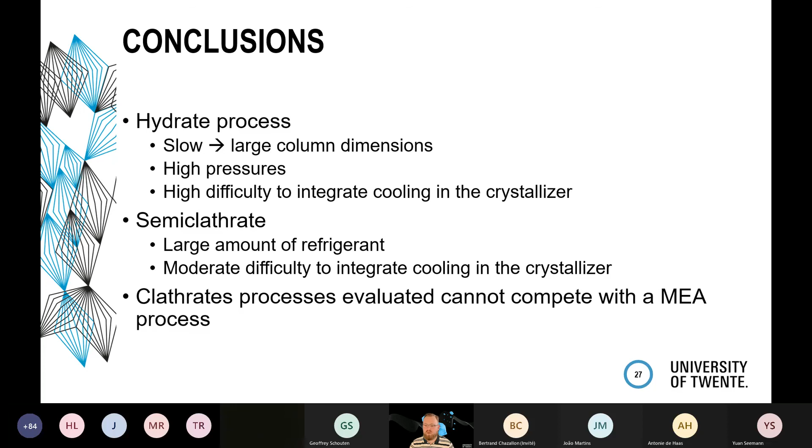For now, the processes we evaluated for the 30% TBAB process and the pure clathrate hydrates are not sufficient to compete with a MEA process, mainly because of the cooling costs below 20 degrees with refrigerant, and the fact that a single stage is simply not enough to reach the desired specification for storage.

So what will be our recommendation? It would be really nice to have a semi-clathrate salt additive that allows operation at higher temperatures so we can eliminate the need for a refrigerant. Then almost the whole process would be roughly above 20 degrees, which would be very positive for the cooling duties, especially for the refrigerant.

Look into a multi-stage crystallization to reach a higher purity of CO2, and do some optimization studies for the pressure, temperature, and especially the driving force trajectory, as well as the weight percent of the additive, for example TBAF or TBAB. It would be nice to have a clear optimum—we chose 30% since that was the literature optimum, but that was specific for TBAB.

Since these are only ideas for us now regarding the equipment and the crystallizer, they should be tested first on lab scale and then maybe on a pilot plant, to see if it actually works, if we can reach those contact times, and if the heat integration or heat management inside is sufficient. Those are all aspects to look into further.

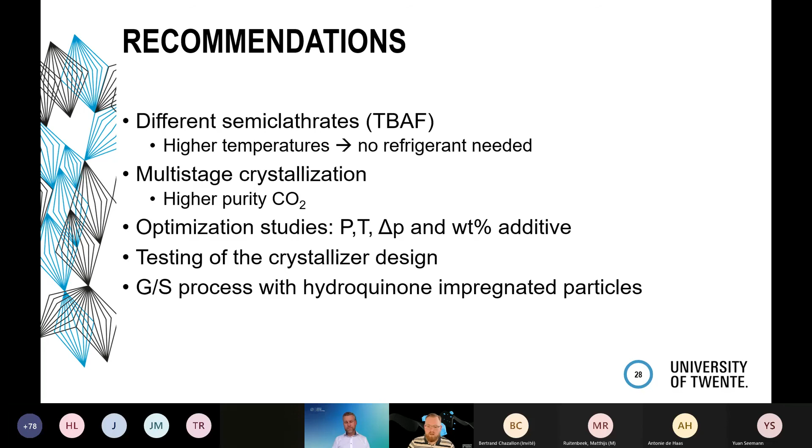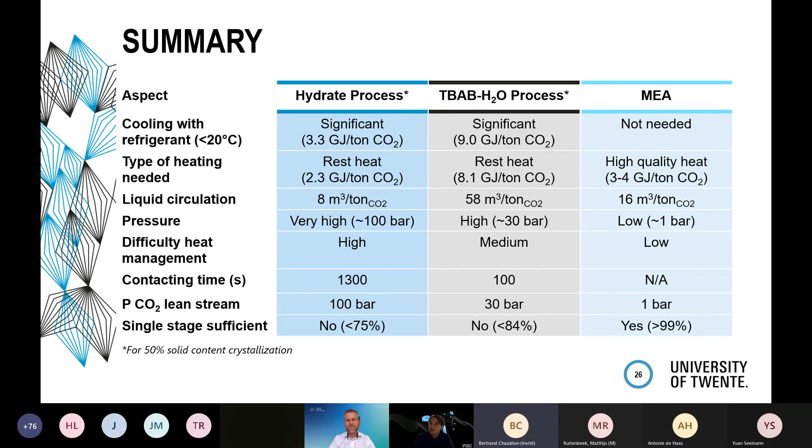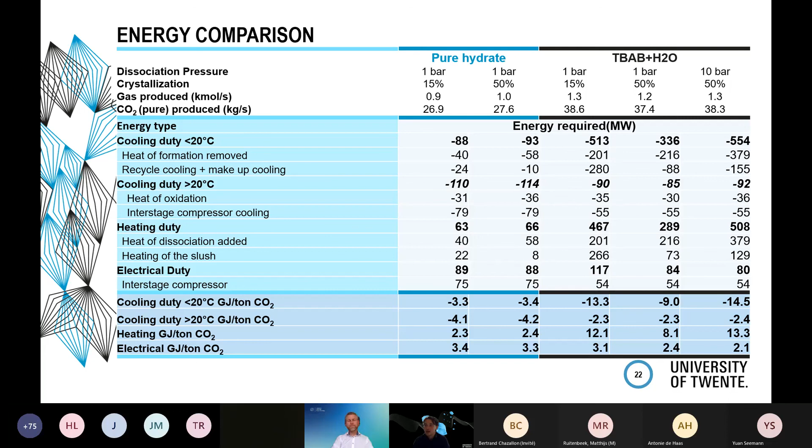It's an interesting thing to see initially, but important here to note, as we've shown before, is that the formation enthalpy is considerably higher. Another thing to note is that you need a lot more liquid, and because of this you require more cooling duty, both because the formation enthalpy is higher and because you have more liquid that you need to cool. So formation enthalpy will create some heat? Yes.

Right, there is still time for one or more questions. I see Federico Consonni, please. Yes, hello, thanks for the very interesting presentation. I was thinking, what applications are you foreseeing for the CO2 processing, and do you think the purity of CO2 is high enough for being processed in other chemical applications, or would you need some purification process to increase the CO2 concentration?

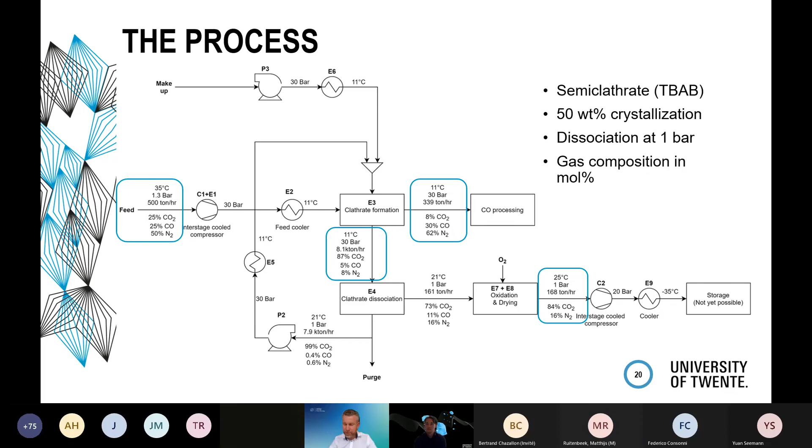Well, it's a nice bridge for me to end the question and answer session and encourage you to register for the event on the 22nd of June, in the afternoon from 1 to 5 o'clock Central European time. There you will also learn that we look at two routes for using the CO2, Federico - one goes to ethanol through fermentation using gas fermentation technology, and the other to naphtha using Fischer-Tropsch. But again, I would strongly encourage you to register for the 22nd of June event where we will tell more about that.